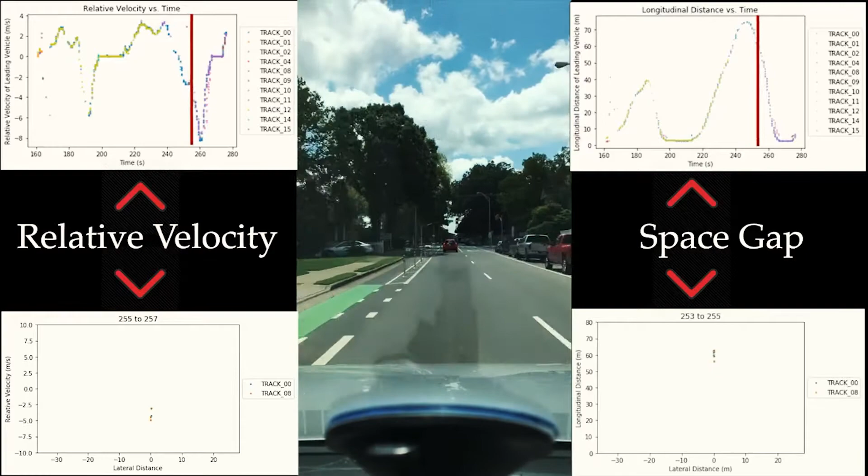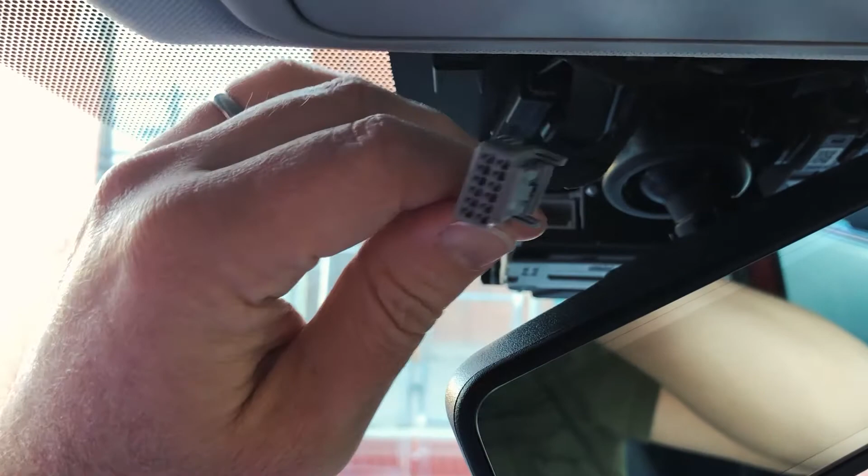The Circles project seeks to extend this technology to real-world settings where reducing these negative traffic effects could provide over 10% energy savings by using only 5% of the vehicles on the road to pacify traffic. With a small number of Level 2 enabled cars, we will demonstrate the ability to improve global energy efficiency of the entire traffic stream.

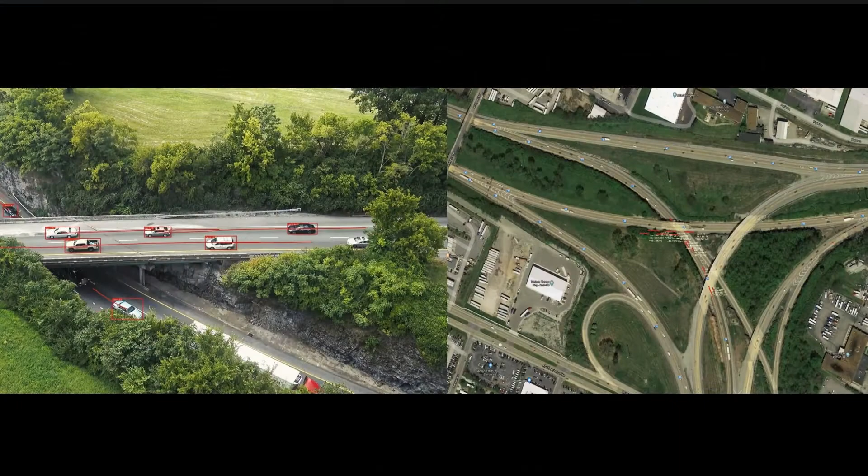Our team, ironically empowered by the COVID-19 pandemic, features multiple highly collaborative and cross-functional subteams, from microsimulation of traffic dynamics to physical vehicle deployment, from mathematically optimal vehicle controllers to AI-trained control policies, and from computer vision tracking of a highway corridor to vehicle energy modeling. Each subteam helps piece together a complete mitigation pipeline.

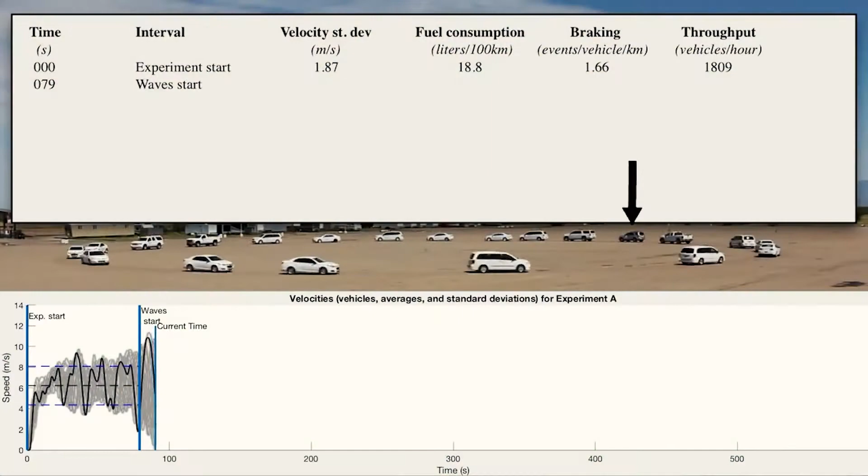First, we will hear from our wave calibration team, our most eclectic team, consisting of members from 4 universities. The team works on modeling the flow of traffic, ensuring that we have microsimulations that accurately depict phantom jams. Phantom traffic jams seemingly occur without a cause, but are in fact due to the way that humans drive. When roads are sufficiently crowded, small deviations from smooth traffic can grow into phantom traffic jams, which ultimately leads to stop-and-go traffic. These jams waste time and energy and are a common, frustrating experience for many commuters.

A goal of our work has been to extend the open-source traffic simulation software, known as SUMO, such that it can produce these phantom traffic jams and match our field observations. It is essential to be able to simulate these features of traffic accurately so that we can design our control algorithms to eliminate them.

Next, the energy team, operating at the cross-section of applied mathematics and engineering, builds the models by which we evaluate energy improvements and, spoiler alert, reward our reinforcement learning agents. To quantify the energy improvements, both in simulation and in actual road tests, a hierarchy of vehicle energy models is developed that accurately capture the impact of driving under strong non-equilibrium flow conditions, yet are structurally simple and generalizable.

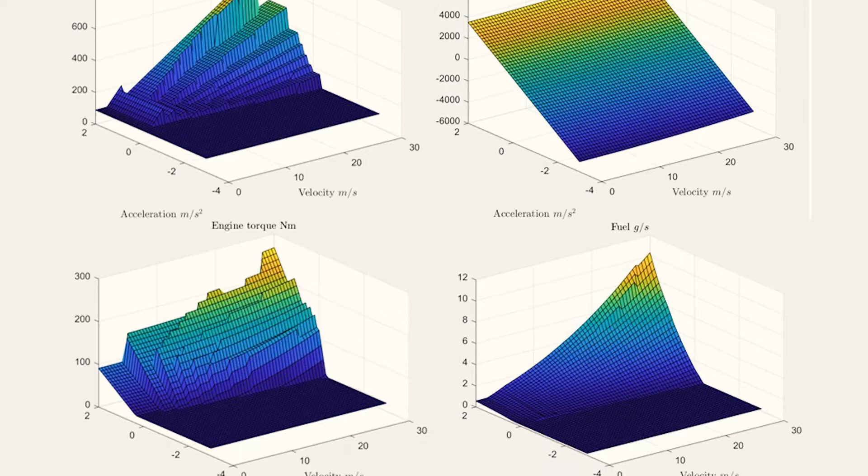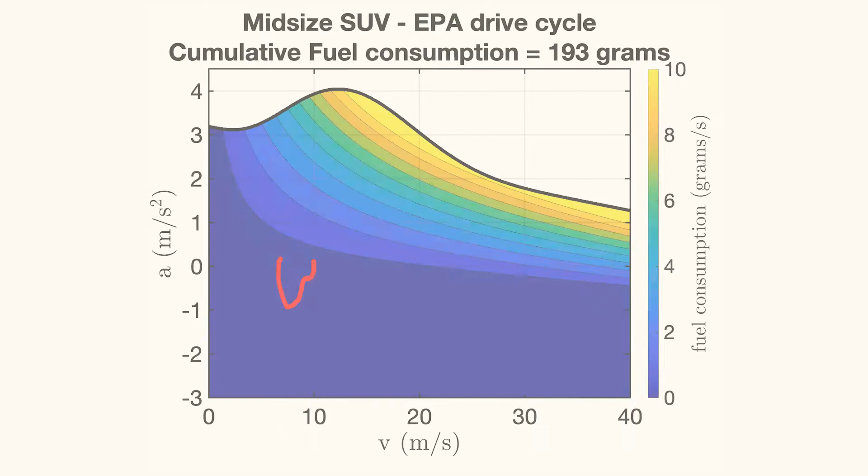The Circles team is using the highly accurate and complex vehicle energy software Autonomie, which is developed by the Argonne National Laboratory on behalf of the US Department of Energy, and is developing systematic model reduction techniques to derive a hierarchy of simplified models. The model reduction pipeline exposes the Autonomie energy models to a virtual chassis dynamometer that works just like a physical vehicle testbed. The dynamometer exposes the vehicle to a full parameter space of possible driving conditions, and thus yields accurate energy metrics for highly unsteady driving. The energy models are then combined with traffic models that reproduce realistic traffic waves.

Next, we will hear from our hardware team on how vehicles are being prepared for sensing and actuation, with an emphasis on scalability up to a 100-car CAV demo. We have to look beyond using the single vehicle from small-scale experiments and start thinking at a much larger scale. How might we take 100 vehicles that we can control and do that without a monumental cost to actuate all of those vehicles?

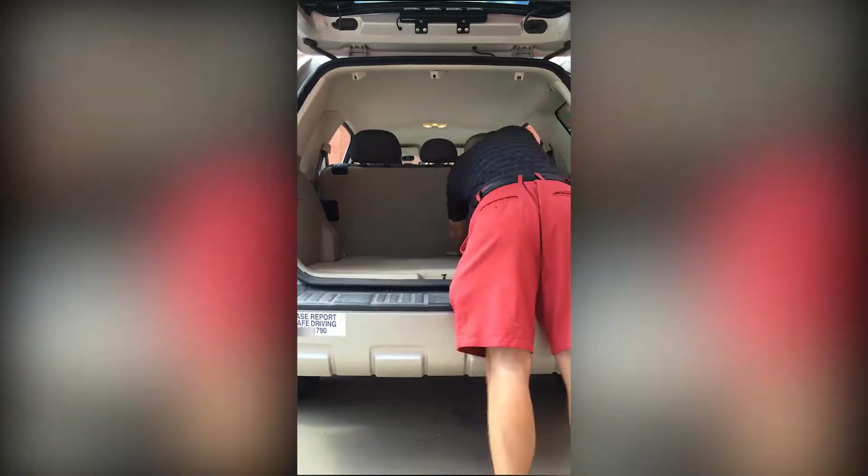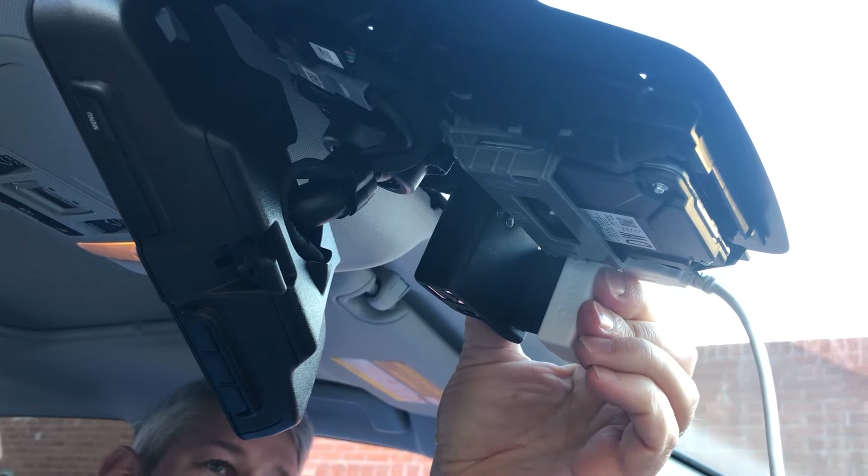The way we're doing it is that we're going to be using available commercial vehicles as controllers for optimizing the traffic flow by plugging in our low-cost computers into those vehicles. This allows us to actuate the vehicles at a very low cost, taking advantage of the existing networking and sensing that's found in today's vehicles straight off the production line.

In addition, we can also gather data from those vehicles in their everyday use in order to train and validate the controllers that we might be using. This allows us to check wave dampening cruise controllers that we're planning to deploy against human driving to make sure that we don't put together a controller that would be unlikely to drive like a human.

Speaking of controllers, the next 2 teams we will hear from are taking 2 vastly different approaches of designing vehicle controllers. The first team is using mathematics to derive an optimal vehicle controller.

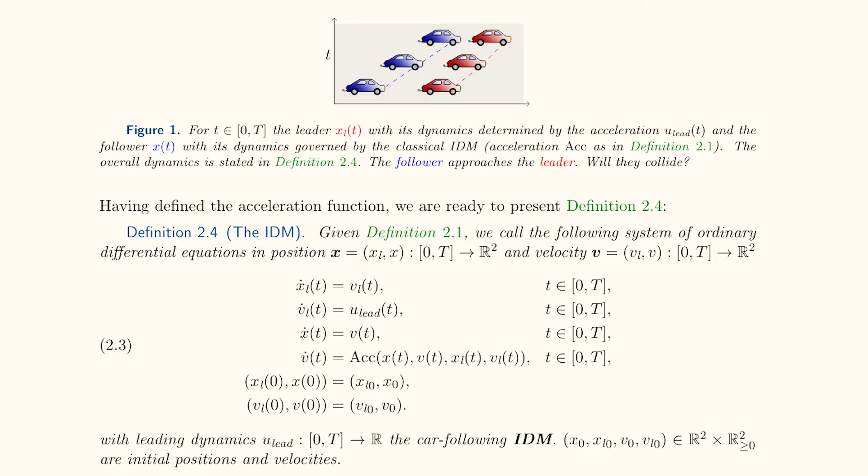The control algorithms are designed using mathematical models at different scales, including microscopic, mean field, macroscopic, and also multiscale. At the microscopic level, we combine traditional follow-the-leader and optimal velocity models, as well as consider the intelligent driver models. At the mesoscopic and mean-field level, we pass to the limit in the number of cars, obtaining coupled equations for the controlled cars and measures, which are mathematical generalizations of functions, empirically interpretable also at the microscopic level.

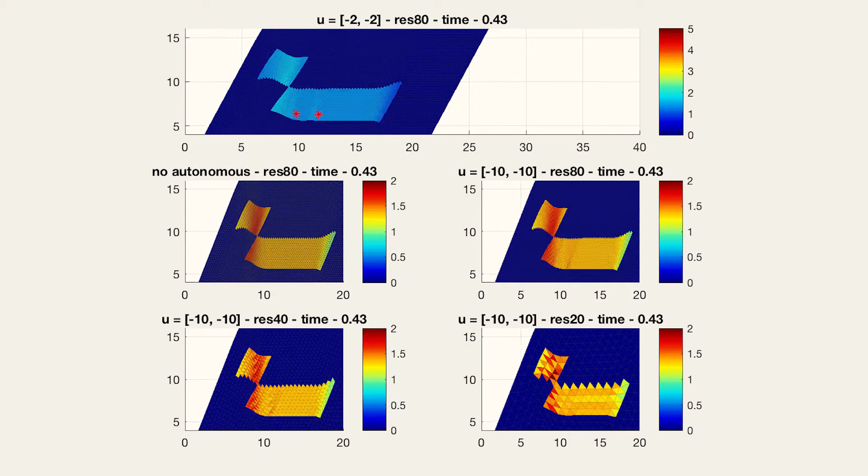Finally, macroscopic and multiscale models are obtained by coupling partial differential equations representing wave dynamics with ordinary differential equations for the autonomous vehicles. The control algorithms are designed in a hierarchical manner, combining safety control, Lyapunov functions, PID controls, and hysteresis.

This next team employs deep reinforcement learning to train controllers. This team utilizes the energy team's models in their reward function and exposes the agents to various curricula to build robust controllers. Learning in large, many-agent systems pushes the limits of multi-agent reinforcement learning algorithms. While these algorithms have achieved superhuman performance in board games and video games, the complexity of traffic systems poses a new set of challenges. Traffic systems contain many more agents than these algorithms are often designed for or tested on, and require the controllers to be both safe and robust.

We started by testing and tuning our approaches on small networks, exhaustively filtering through state-of-the-art algorithms to find suitable candidates for our problems, and along the way developing new ideas for how to scale to systems with so many agents. We gradually increased the complexity of the systems that we worked on, moving from single-lane to multi-lane highways. At the moment, our system is designing controllers for a 1-mile stretch of highway, containing almost 1,000 human drivers and over 100 reinforcement learning agents operating simultaneously.

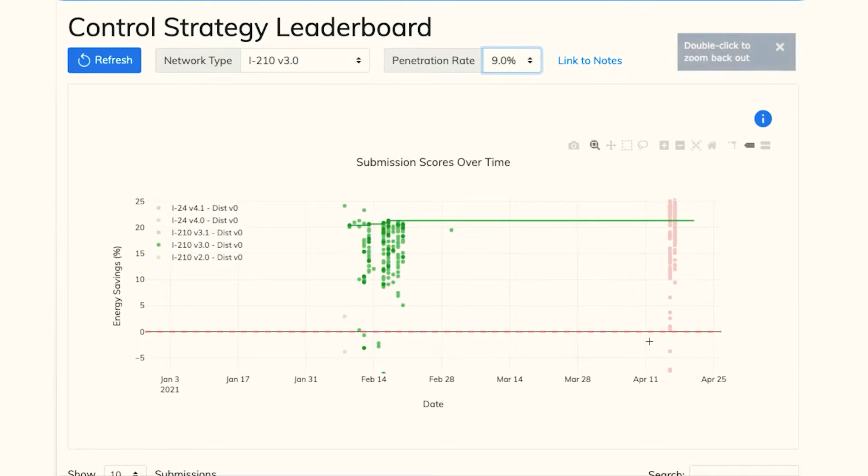Whether a controller is analytically optimized, hand-designed, or trained via deep reinforcement learning, it can be simulated in a traffic environment with SUMO via our team's framework, the Flow software package. Our team has built into Flow a data pipeline for the automatic and standardized evaluation of these controllers. Simulations can be uploaded to an S3 bucket in AWS, which triggers a series of SQL queries that post-process the data into various reporting metrics.

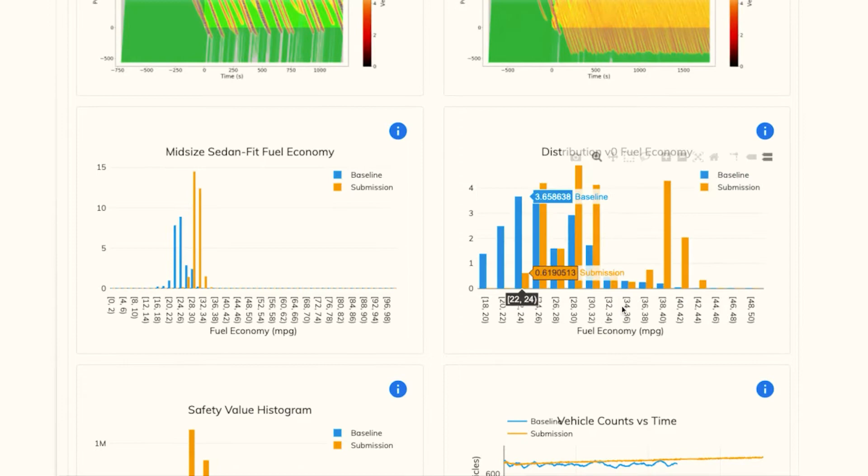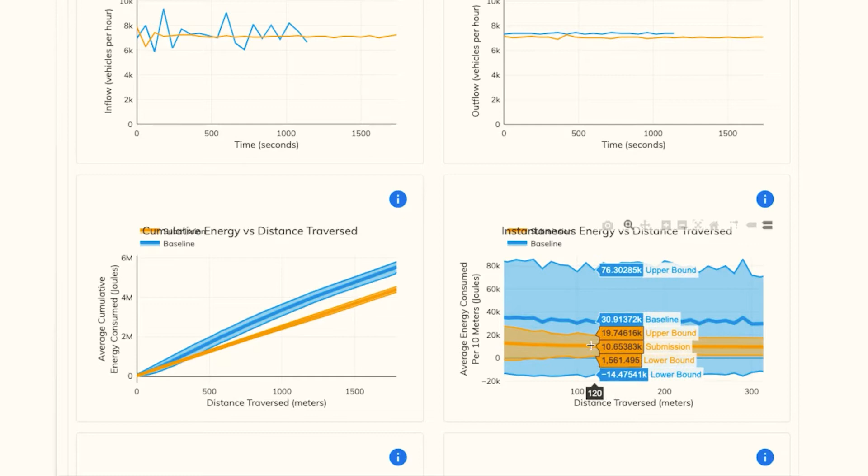We've also implemented a front-end leaderboard that can display these computed metrics. This tool allows anyone on the team to view all submitted controllers and objectively assess them across a range of predefined metrics. This assessment of controllers in a simulated environment facilitates building trust in the efficacy of our controllers before moving them onto the next phase, testing for safety and controls in preparation for migration to physical hardware.

For the topic of migration, we'll hear from the hardware team again for controller policy transfer onto the vehicles. After we develop these controllers, we do a significant amount of safety testing with software in the loop as well as hardware in the loop to validate that the controllers will still behave safely when we transition them from simulation to the cyber-physical system. By building this pipeline, it allows us to take field experiments directly into live traffic much earlier than we normally could.

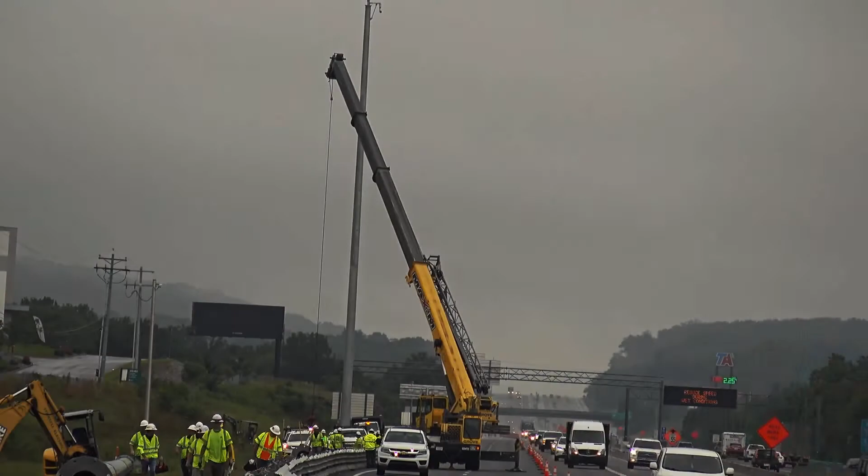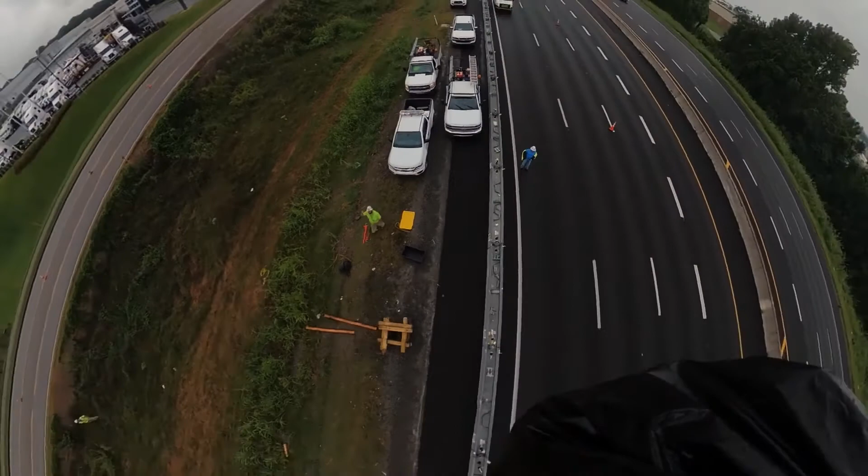Finally, our testbed development team is the last piece of the puzzle to pull off our field experiments in live traffic. Because of the high cost of traditional camera-based traffic monitoring systems, it has remained very challenging for the research community to get good data on the features of these phantom traffic jams. In a partnership led by the Tennessee Department of Transportation, we are building a testbed known as I-24 MOTION.

Located near Nashville, I-24 MOTION captures the paths of 150,000 vehicles a day that pass through I-24. I-24 MOTION is designed as a scientific instrument, consisting of 4K resolution video cameras mounted on tall poles that offer a continuous overhead field of view of the roadway.

Multi-object tracking computer vision algorithms convert the video data into trajectories describing the position, velocity, and acceleration of each vehicle. This trajectory data is validated with high-fidelity vehicle data collected on our own instrumented vehicles. Because I-24 MOTION captures the trajectories of all vehicles, it allows us to estimate the energy savings to overall traffic resulting from the deployment of our automated vehicles on the roadway.

As you have seen, this is a sprawling effort with high ambitions. Our multiple sub-teams consisting of over 50 members spanning 5 universities and 7 time zones are working hard to bring this all together for a medium-scale test in Nashville this summer, followed by a 100 CAV full demo next summer. All of this is possible not because of individual components, but because of everything coming together through convergence research.